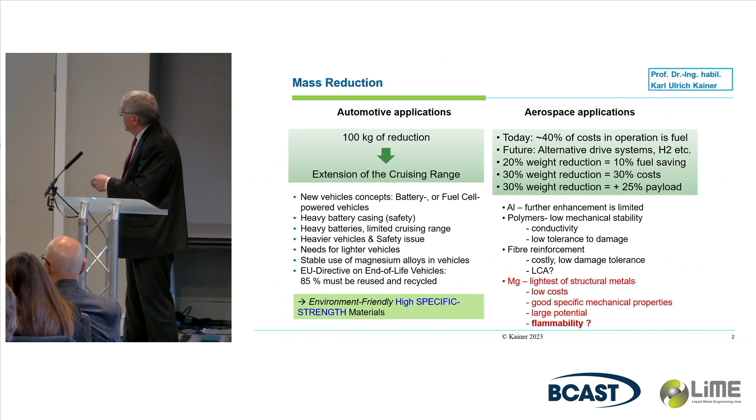This is a very nice slide I've used several times. I believe you know everything on this slide. In the past, I had here saving fuel, 0.5 liters per 100 kilometers. Now we have to switch over to extension of the cruising range, and magnesium can contribute.

The issue we have to face now is dealing with new vehicle concepts. In the past it was very simple: light, combustion engine, you save energy if you have a light material, and so on. But now we have other issues, like the heavy loads with the batteries, safety issues, and also end of life, which is very important.

I will come very shortly on this end-of-life issue for magnesium, which is a little bit difficult compared to others. In aerospace application it's more simple: you have to have higher payload, and you have to reduce the weight. But for magnesium in the aerospace industry, it's a little bit different as a structural material.

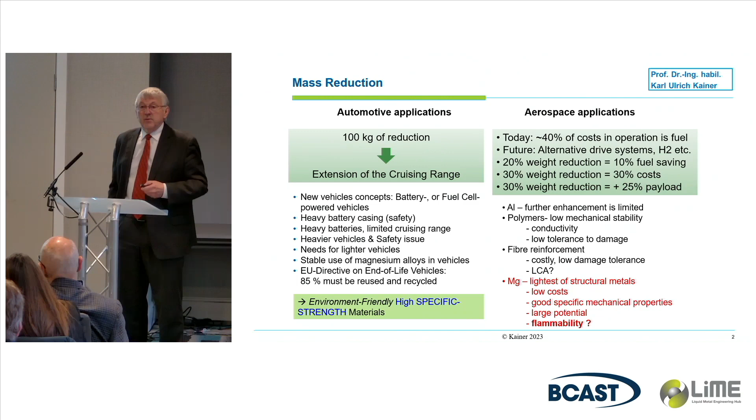But in the end, we have flammability. That's the main issue. By the side, the corrosion properties are also a big issue. The need for high specific strength material is good. Magnesium has low density, it works very well if you calculate it, but the two can be a little bit different.

First, carbon footprint, green magnesium. If you want to do something today with magnesium, people ask you: how green is your magnesium? This is a slide from 2018, showing the different processes and their different contributions to CO2 in the environment during use and during production.

This is the average Pidgeon process, which is still existing in China, about 95% of the material processed with this technology, a bit better than in the past. If you calculate some credits, meaning you use the waste material for concrete and other things, you get a benefit, and you get a break-even point in a lifetime of 200,000 kilometers.

But we are dealing now with new vehicle concepts, which means finally we have a lower lifetime, and the break-even point is then very difficult to achieve. And you need new processes.

New processes, in this example, the electrolysis industry in Qinghai, in the desert in China — they bought it from Hydro in Canada and converted it into a technology which is more green. It's not running really well now, but this is the only technology that offers a solution for a green environment.

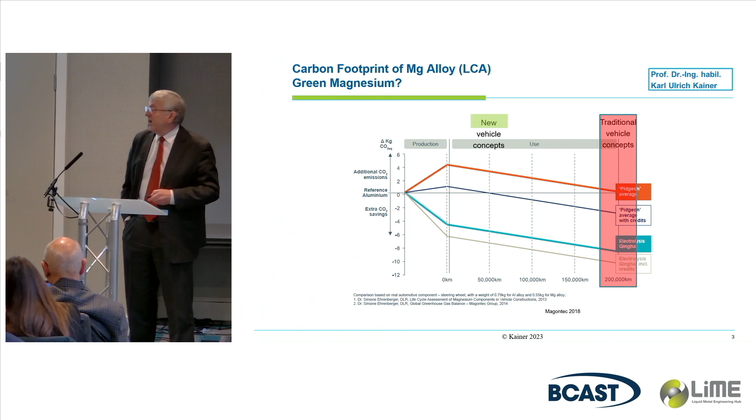I like this slide because when I started with my Magnesium Innovation Center, there was very low consumption of magnesium, and that was a forecast. It showed these numbers, and everybody said, okay, we have to invest. And that is the truth — nothing happened. I like those forecasts made by those people.

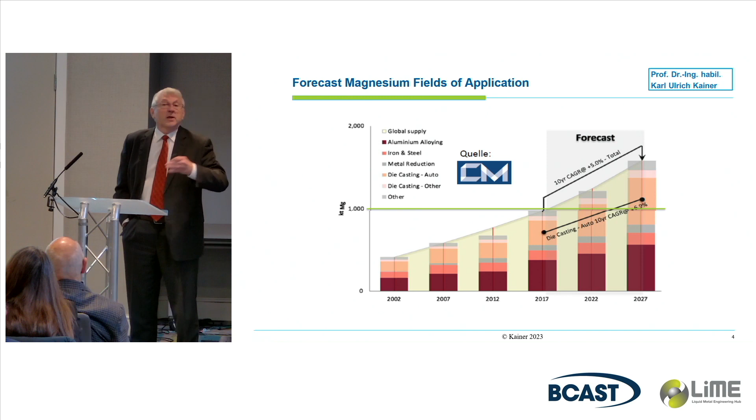We are now at about 1 million tons, and this is the average for the last 10 years. It's not plus or minus something — not more.

One of the reasons — I'll show you one example. I chose here the Chinese price for magnesium, and here's what happened during COVID: the price jumped up. We had the same thing in 2008, and everything calculated for a new project was stopped. Then it took another 5 years to go up in development, and the same happened now.

The price jumped up because of the energy crisis and so on. The industry doesn't really rely on the magnesium market, because this can happen suddenly again. And I can tell you today we have issues with companies like US Mag.

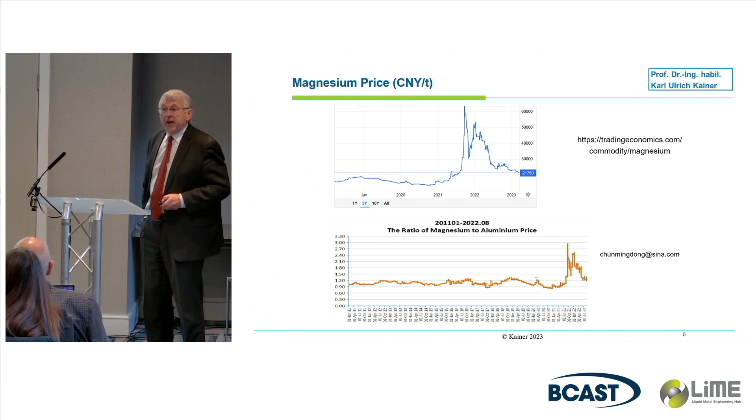You know, Dead Sea is one thing, but Salt Lake City has no water. And now they're thinking about pumping water into Salt Lake City to get enough brine for production. They shut down. Again, now America is depending not on China, but Canada is also delivering some things. And this will also have an effect on price.

Reliability of the magnesium market is lost. Okay, we're coming now to Europe. We are now in Europe. And if you look at this sketch, from 2018-19, this is now 190 kilotons magnesium in use. You have here metal, pure metal imports, then alloy imports, powder, and then also in aluminium alloys, and then in products—it's also in the market. This is a total figure.

But you don't see any recycling material in this case, because it's not there. It's gone, it's lost. And we are dealing with this, and the main components are magnesium casting and aluminium alloying, and this controls the price. If the aluminium industry is doing well, magnesium price jumps up, and I don't believe they're doing very well.

And the other products are not so important. In this case we need 100% of magnesium alloys. In this case only 0.1% for the aluminium industry. It's a little bit different, and this is more critical for the price.

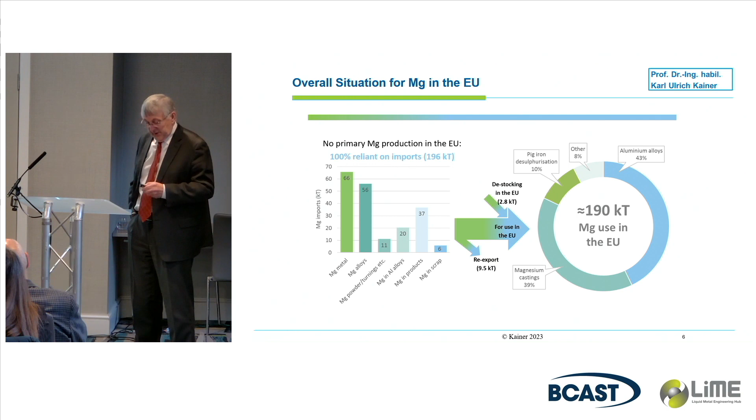Okay, coming to the processes, I believe this is all well-known stuff. Most of the alloys are cast. We have a very small market, the wrought alloys, and we have new processes. It's near to zero compared to the other. But high-pressure die casting is a dominant technology. We also have some so-called modern types of technology, and this is coming back. Thixomolding is a process which is now coming back, especially for e-bikes and scooters, and so for smaller parts. Also, they're dealing with bigger parts probably.

Okay, research is a little bit different. Only very few research projects were done on cast alloys, mainly on wrought alloys. And if you compare to this one here, it's strange—everybody now wants to work on biomaterials and additive manufacturing, powder metallurgy. No industry, by the way. In wrought alloys in Europe, we have a very limited number of industries, I believe 2. You go to China, you have 100. It's totally different, and there is a market for wrought alloys.

But we have to mainly deal with this one if you want to answer the question: is there a future for structural material? It's only a future today in high-pressure die casting, from my point of view.

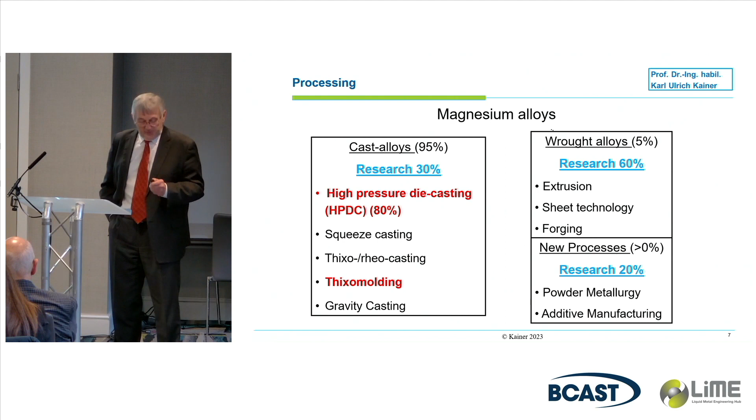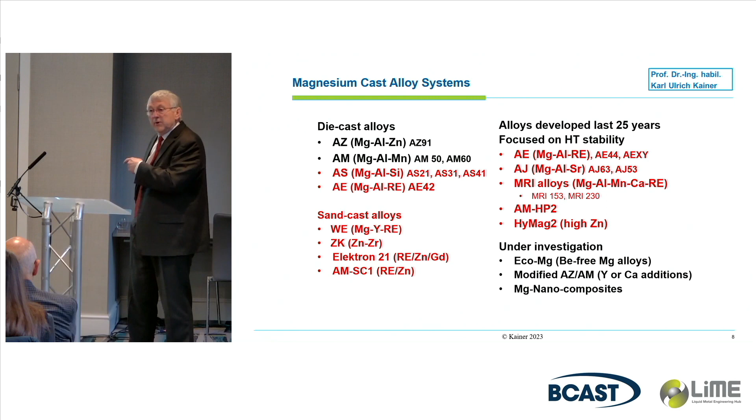There is other development here, which is very important for public transport, for aerospace, for jets—material which shows low flammability. These are the technologies which are now adopted from different places, and they work very well. But you have to bring it into the process, because if you want to cast that material by high-pressure die cast, it's a little bit more difficult compared to the other technology.

Yeah, this is a thing we're dealing with. People like to add some of this alloying element to get good results, and the result is mainly increasing the cost. And the castability is reduced, and then you have issues, and people can't handle it, and the mechanical engineer can't design a new part from the data they got, and it ends with stopping of those activities.

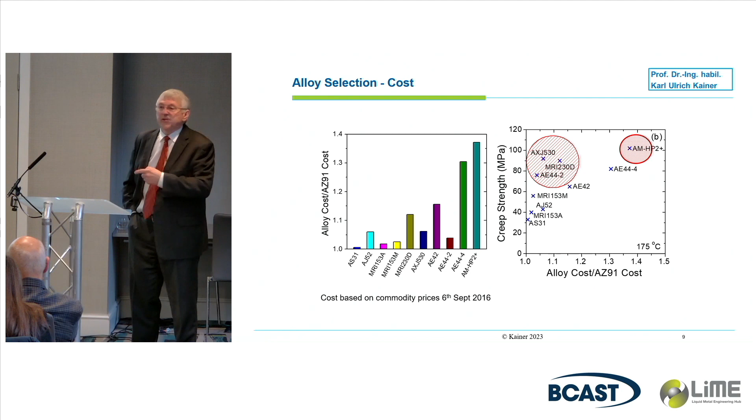If you look at those alloys developed in the last 25 years, they are niche market developments for Porsche and racing cars and other things. Nobody really wants to sell it, and especially if you're dealing with combustion-engine-free e-cars, there is not a need for those materials. But there were very few developments in the case of crash versions. Very few, nothing, near nothing. By accident you get a result - for example, rare earths containing alloys showing better crash performance than the other alloys. But it's not good enough.

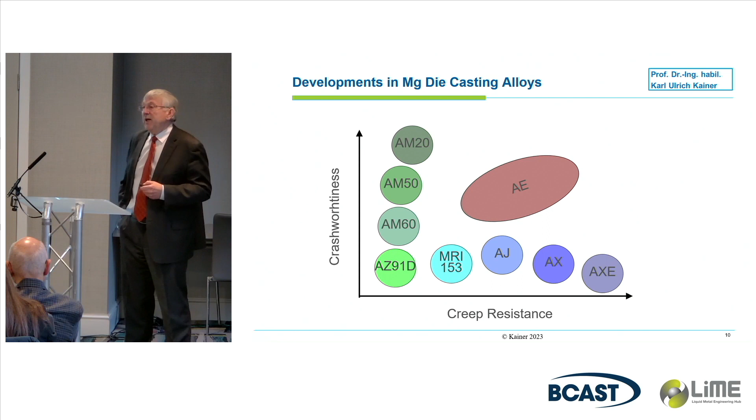I believe this is something we have to do in the future. If we want to use it as a structural material, we need better results in crash performance, in ductility and in fatigue. And this is very important.

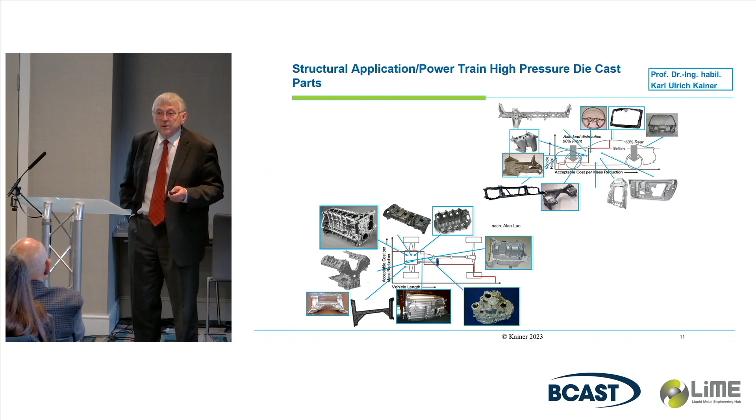Take a look at the structure. I believe this is the past - all these very nice big parts with creep-resistant alloys. We have few applications, niche cars, but I don't believe that will be the future. This is what exists now, and the only part which has really guaranteed survival is the steering wheel. I believe in 90% of cars, the steering wheel will exist in the future too. But I believe there are some parts, like seats, and we will see if they have a future. It's a question of market, cost and supply.

Okay, this is the idea, and let's go through some of these things. I believe these are well-known parts - cross-car beams, IPs, for bigger cars. This is from the Smart. This is from the S-Class. And this is very strange - this is a part from China, from a truck, and it's cast in one piece.

And this is unbelievable - I saw this part, half the size of the room, I believe. It's very nice to see that they are able to do it. I don't know about the performance, but it looks good.

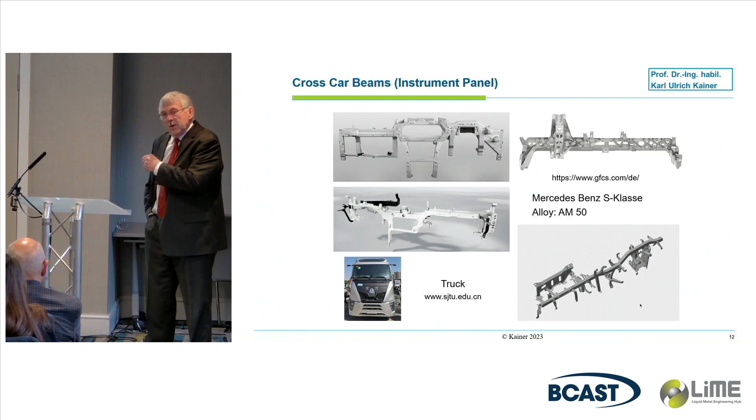This is one thing. Then we move to e-cars, electric vehicles, and we now have the chance to use those materials which are well known, like AZ91, for different types of applications - housing, transmission integration, side cover of the motor, side plates. These are examples, and these are the weights of the different types of parts. I also have to learn that some of those parts run at higher temperatures.

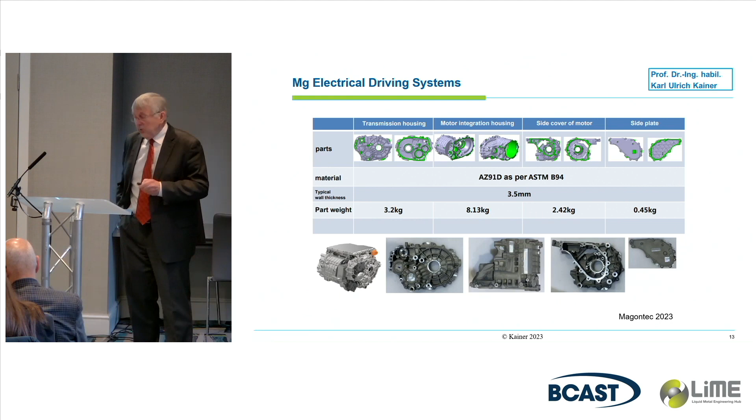And then you have to deal not with AZ91 - you go back to those alloys which are more creep resistant. This is more complex, but I believe there we will have a future. I don't believe we have to develop a new alloy for those applications though - the existing alloys will do the job in the future too.

One example here is housing the drive module - sorry, I was too fast - the drive module. This is also a very nice part because it gives a certain weight reduction and also some weight for the magnesium market. And if you have a large number of those things, you can overcome the issues of a market.

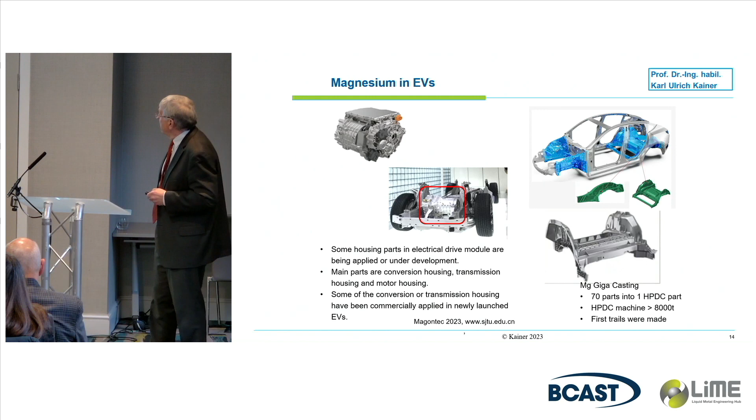There's another thing, and there was a discussion yesterday about this - a Tesla, and here you have the magnesium giga casting. It was already cast in magnesium as an example. It was shown it's possible, but it substitutes one-by-one - I mean, it's not redesigned for magnesium, just using the same die and cast. And looking at the size of the machine, we're dealing with more than 8,000 tons. I don't believe in Europe we have many of those - we have those in China. I saw those things, and I saw also the part. I was really impressed - it's possible, but I don't know if it's advanced enough in development.

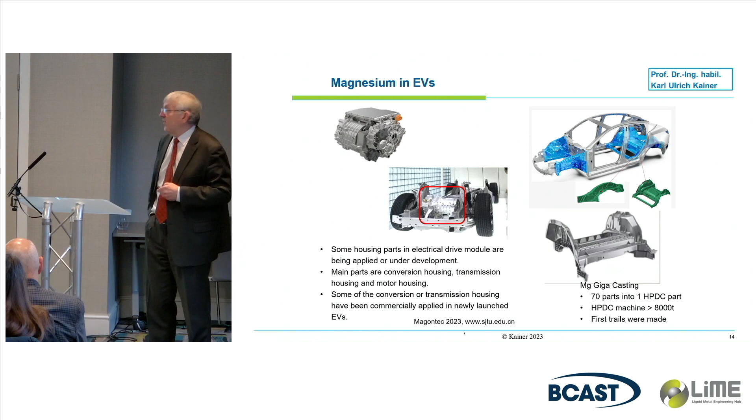There are some other problems they have to face in the application. This is another thing which is very exciting: the battery upper casing, and this is also already cast at different companies to test if it's possible. And it is possible to cast. Now, in this case, we have to deal with other problems - environmental problems, meaning surface treatment. What about crash relevance? What about corrosion resistance? And also what happens if it's heated up? It's a little bit different, but from the casting point of view, it is possible to do the job.

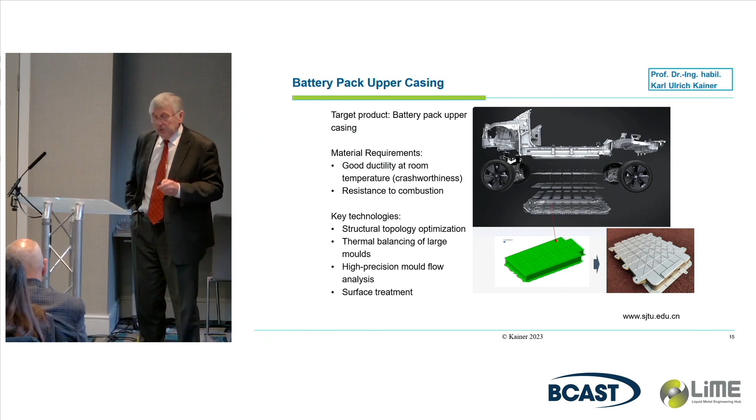Yeah, that was a very short excursion in this market. Now we're coming to the thing which is, I believe for me, normally nonsense.

You start with the ingot, you convert it into powder by grinding or by atomization, and then put it again into technology to produce a single part.

But I have to learn that it is a green factory, because you can build it in one day without any issues. If you're working with casting equipment, a melting furnace, you have environment issues, you have to fulfill requirements for fire and so on. This is making things more simple.

You have a large possibility of variation in the granules. You can mix it, you can make MMCs, you can do everything with it. A very good technology, a little bit more costly, but it works, and I believe people know how it works.

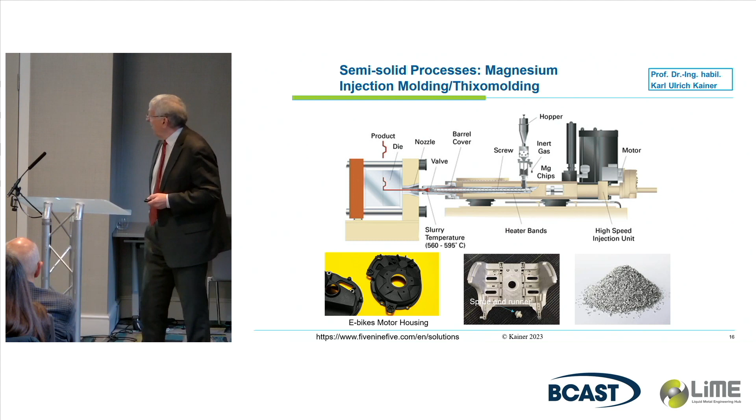You see it's a seat part, and what you can see here is a sprue and the runner. This is the only part which is waste. And this is still a bit different. In the past, you have 40% waste. First, you convert it into powder, and they have 40% of this expensive thing. Now we have only 2 to 5%, less than in some of these magnesium castings.

Okay, seat structures are also showing up. This is thixomolding. This is high pressure die casting. This is also something which will have a future.

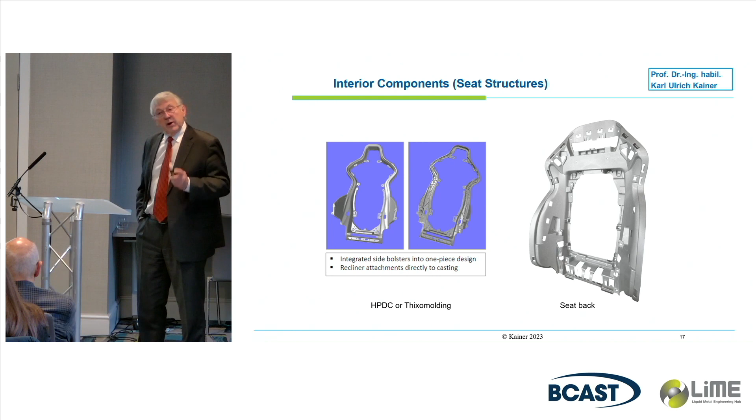Even there are some issues, but also in public transport for buses, trains, and other things, there is also a future, but you have to use a different alloy. This is, by the way, the problem.

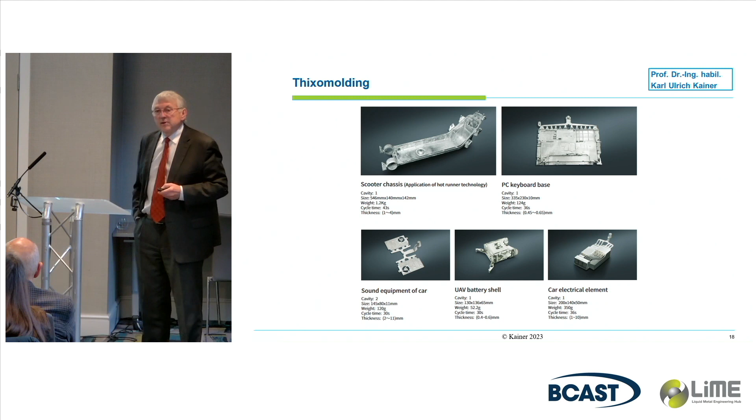Or you have here some housings. The number of small housings produced by thixomolding, and this is also showing good performance, and also the cost is okay from this point of view.

This is very interesting. It's a battery housing for a new different system, not for the car. This is aluminium extrusion and overcast by thixomolding with some magnesium alloys. This is a net-shaped technology. You use the extrusion, then you have the overcast, and then cut the runner, and then you have your part. This is existing, and it works very well in those applications.

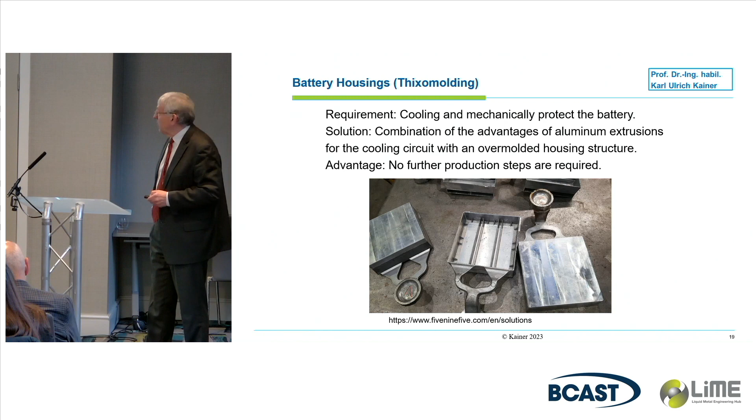Okay, this I have to show because the competitor for the research they did here is steel, and I was involved in the development of this alloy, and it's running. I don't know if STIHL did the job, but this has been running now for 2 years.

This is a piston, a creep-resistant alloy application. Mass production, more pistons than engines in automotive, but the weight is a little bit low - you're dealing with 100 grams, which is nothing, but it's a very good market, and it shows that it's possible to produce a creep-resistant alloy for a motor application.

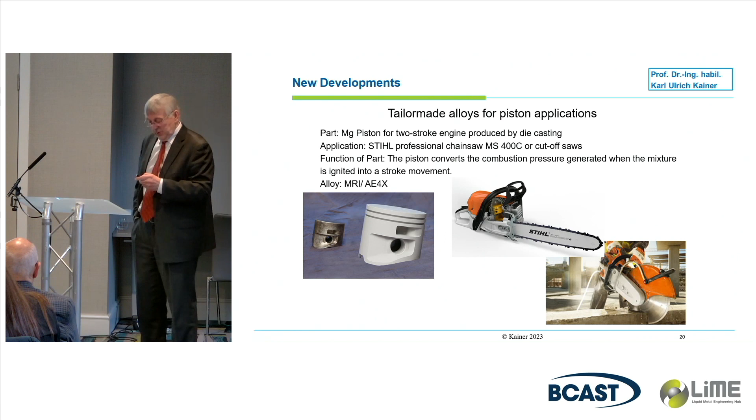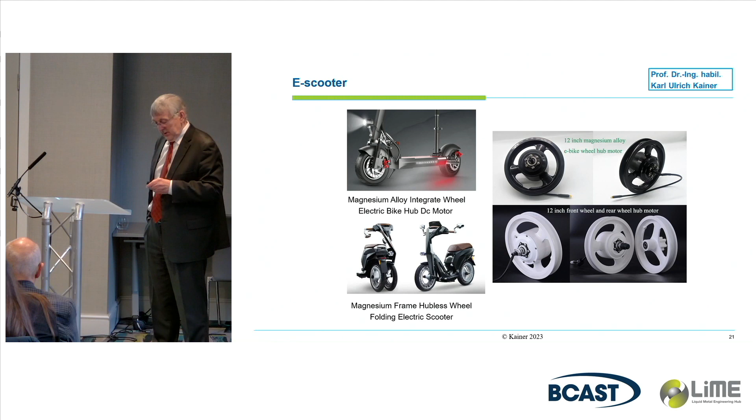By the way, I'm a little bit sad because we have no industry in Europe who use it. You have to go to China. In China, you have 3 companies doing this technology - twin roll casting, and then rolling. You get this very fine microstructure. You get the texture you need to have better deformability in the processing.

Hemming is possible, and this whole thing is so fine. There was a solution for the coating, everything fine, but nobody wants to pay. It's too expensive, still too expensive, and it was run in a Porsche application. You had, I believe, 130 pieces a year, roof part and GT3.

But the market is not really developed in Europe. In China, you have a number of applications, buses and trucks. You also have concepts for the high-speed train. They're a little more risky doing those things than the Europeans, who are more conservative in using magnesium technology.

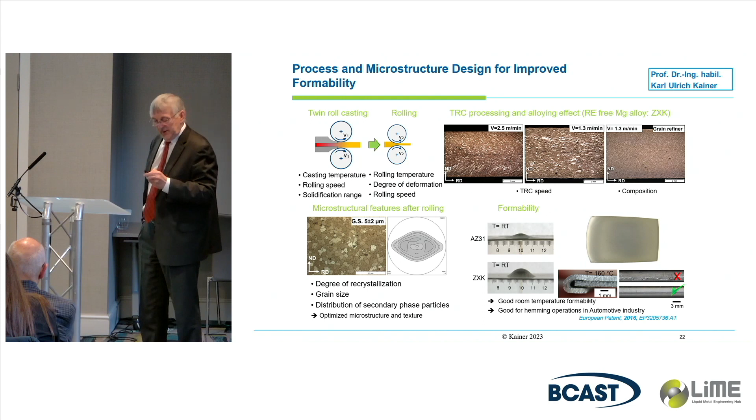This is the only one to show. Normally it takes me 2 days to explain how important it is, but today I have to say the future is not really clear.

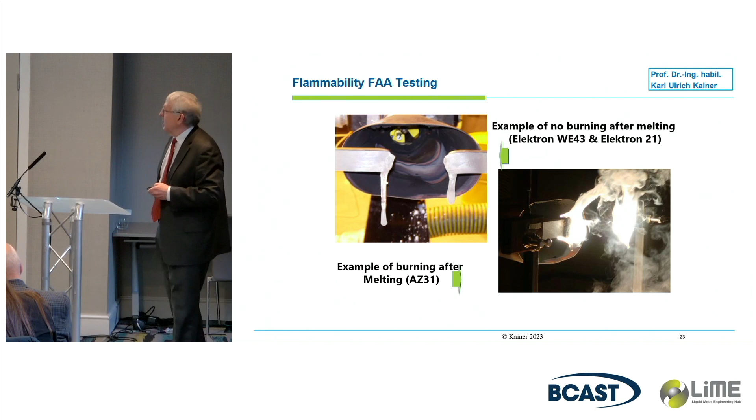This shows here the possibility for each of those existing alloys - AZ91, AZ31, AM50 - you can add it and it works, but the castability is a little bit more complex. Still, it's very good, it works.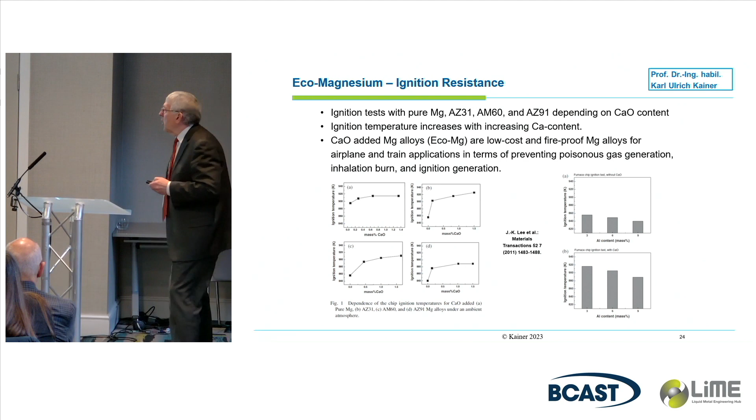And those are some examples. It's a German company, not from Austria. They bought the license from the Koreans and now make trials with other industries to develop seats for aerospace applications for civil aircraft. This is doing well, and you can use it for all technologies available - extrusion, thixomolding, casting - it's good, and recycling is not an issue.

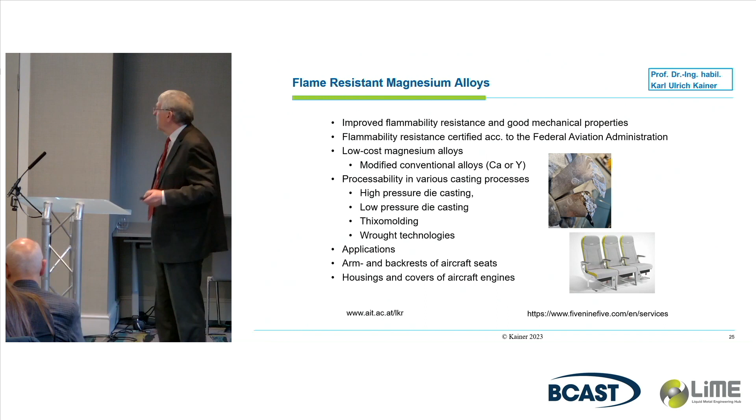The other thing is additive manufacturing. Everybody is doing this too. In the case of magnesium, it's a little bit different - it's mainly for smaller parts, using technologies like laser powder bed fusion or wire-based processes.

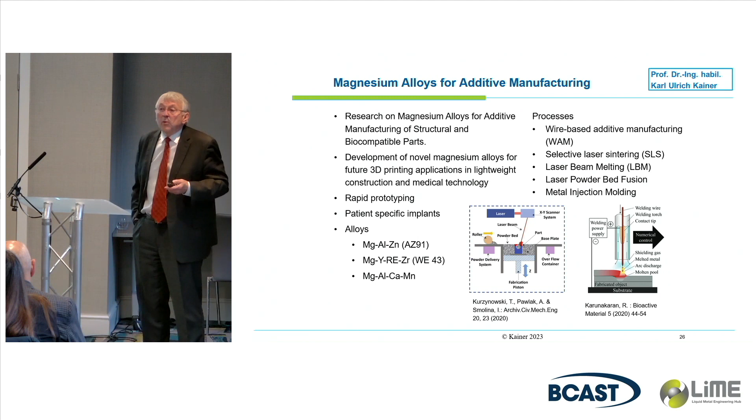This is for bigger parts, and this is, for example, for bio parts, for implants. This technology is used for some of these applications, and very excitingly, you can create a patient-specific implant with this technology. It's also a little bit more expensive, but it works for this case. These are some examples showing the possibility of additive manufacturing.

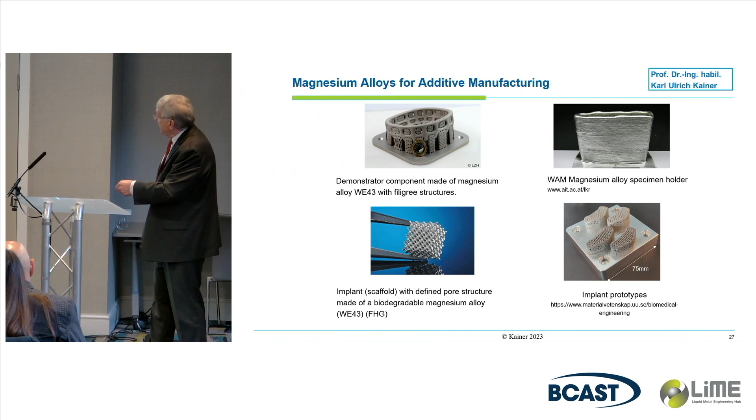This is totally different from aluminium and other materials - you can't produce parts like spare parts the same way with this technology. In magnesium, it's a little more difficult because the cast properties are different. But if you look at this example, it's possible, and they are doing a lot of trials.

And this is the biomaterial - this is a big market in research. In Germany, we started with 3 groups; now we have 200, I believe. And everybody uses AZ91 - it is a mistake. But it shows here the process flow.

You start with the ingot, you convert it into extrusion billets. The extruded material - you drill a hole, make a tube, and then you make a stent from it. If you have some heart attack issues, probably this is a solution.

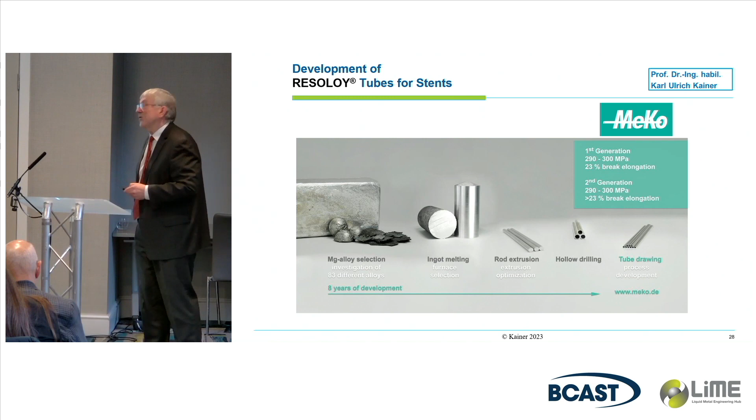I show you here some examples which exist, and there are German companies here - this is a Hannover company, a spin-off of the university. They are on the market. There was this trouble, but they made it onto the market. Approval is a big issue in this market.

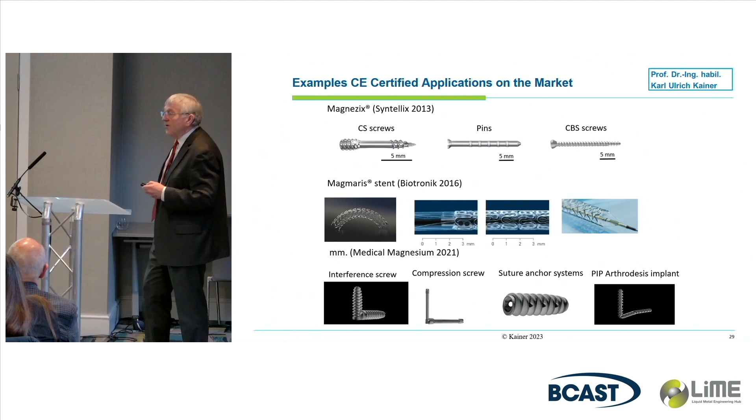Corrosion - this is one thing I want to show. Normally I need more than 1 day for this. If you have a new application, you need a specific corrosion protection concept. You normally start here with high purity - this was done 60 years ago - and now adding some elements like calcium and rare earth gives better corrosion resistance.

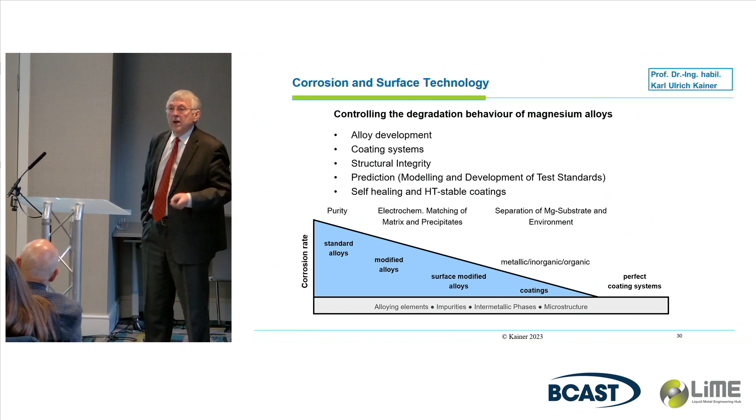This is one thing, but you'd better modify the surface with conversion coating, and then you start with a different coating. In the end, you get a perfect coating system, and today this means it's possible to develop systems which are self-healing. I believe this is a most important thing. The remaining issue is the temperature stability of the coating when dealing with parts like batteries that can heat up, or other things - this has to be developed in the future.

Now coming to, I hope, the conclusion. I put it very rough. Normally, if I read it down, the presentation was done.

But I would like to focus on this market issue. If you want to have a future, you have to stabilize the market. The automotive industry has to reorganize the discussion on the use of magnesium. You need public transport, you need mainly non-primary alloys. This is also in mass production.

Biomaterial, you have large activities, high value added. It doesn't matter what it costs. The material is not a big price issue. The process is more critical, and the approval costs you 1,000% of the price of the material.

Aerospace, I mentioned, and this is also a big market. It's coming up more and more with small parts, but it's not mass production in kilograms. And coating protection is very important.

And if you look to this, a presentation about applications in China again took a day, because they have many advanced technologies, and they are dealing with consumption of magnesium of 600,000 tons compared to 190,000 tons in Europe. Thank you very much.

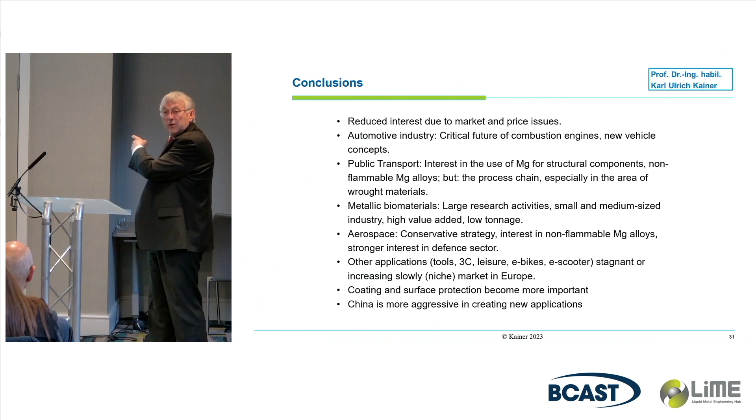In China, where there's a lot more activity, is the magnesium being recycled at the end of life? Is there a process? Is there a loop? Or not so much yet?

No, this is the same issue. Everything dealing with in-house material, this is no problem. End of life, you have to separate the material. Normally it's more easy to produce a type of lightweight material fraction, and this you can put into the aluminium, and with less copper they can work with this. This is the same issue we have to face.

They also buy scrap from Europe, taking the scrap also for the steel and also for the aluminium industry. They have no system to collect those materials. This is a little bit different. In the past, they have groups who were able to separate aluminium from magnesium by hand.

Yeah, that's experience, smelling is right. If you have ammonia you smell, you know this is magnesium. And the Indians also do it by hand, and then you have a magnesium fraction. They have good results, but it's tons, not megatons.